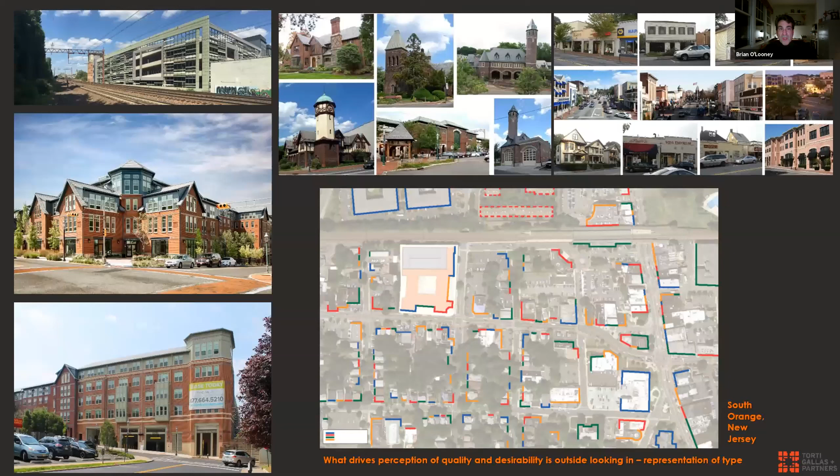Just to show a little bit of our work, to show the framework where we're coming from in putting the book together. This is a project in South Orange, New Jersey. The upper right shows imagery of the community where this very large building was landed into the town, and the colors simply represent different identities within the framework of the downtown of South Orange.

The train station where you get off into town is here, and in placing this large project into the community, we realized that it needed, and we were forced by the community, to come up with ways of scaling it down to take what is a type 5-story wood building, a very large building, and make it feel like it belonged in

a community made of generally smaller buildings. This is not about respecting style. This building actually has two traditional building identities and a modern garage identity. At one point, one of the traditional identities was a modern identity, and we went back and forth with the community discussing what it meant to have a modern identity and what their view of it was. We ended up where there's one modern identity, where the garage represented the modernity, and the other buildings reflected a present take on what they had in their context, which you see again in the upper right.

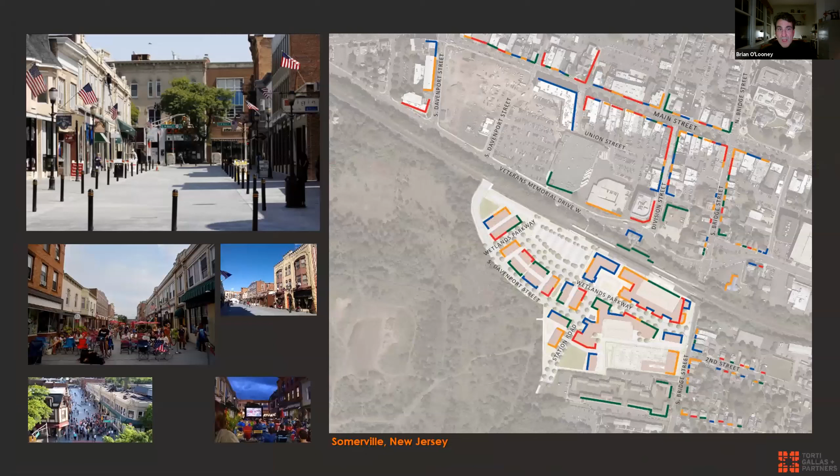Similarly, in New Jersey, another transit project, this one where the whole transit parking lot is being transformed into a district on the other side of the station from the existing downtown. This is a place called Somerville, about 25 minutes north of Princeton. The images of historic Somerville are on the left.

Looking at the project on the right, the project that we've added in the lower part, the image on the right, there's only two types in the whole project. The question is, how do we take those two types and make it feel like it belonged to that community and that neighborhood?

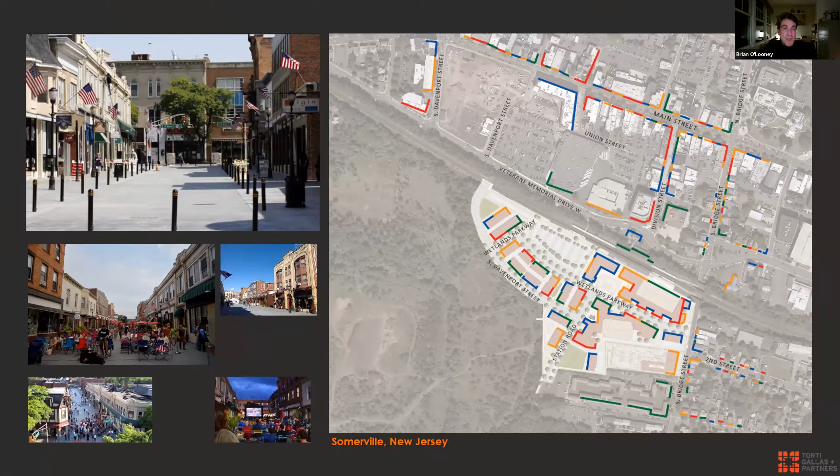So we started creating scaling efforts in a way that made them part of an assemblage, part of one community at the same time. They were broken down in forms that were anchored realistically to the ground, coming with a way of addressing form.

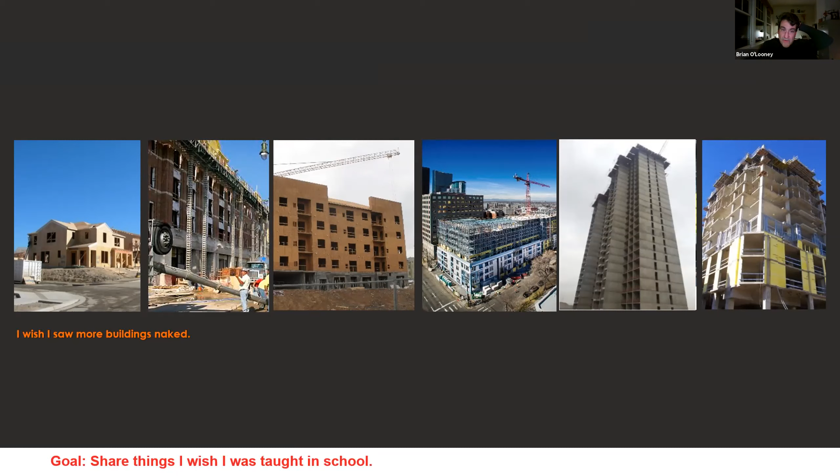And again, it's agnostic. You can't tell from looking at these, for the most part, whether they're going to be traditional or modern when they're done.

And finally, help evolve the incremental thinking in planning and architecture, so that there's less fear about mixing type, because in many ways, in most instances that we've seen, it provides richness and character to neighborhoods and communities.

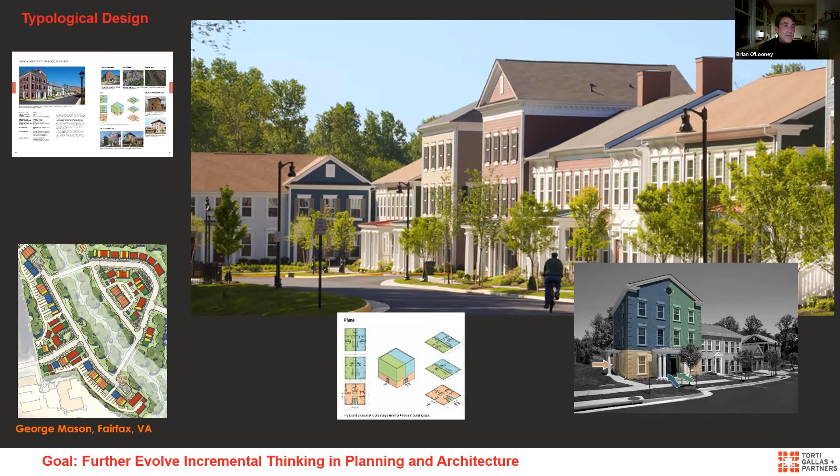And again, those initial neighborhoods, Georgetown, Short North, the Lower East Side of Manhattan, there's a lot of mixed types that make them rich in character. So some of the challenges of putting the book together: simply trying to find a way to present this information in a succinct manner that made it easily accessible.

So we came up with this spread with a large image on the left, data and a description on the lower left, construction imagery in the lower right of the right-hand page, a relative scale image in the upper right that you can fan the book and see everything at the same scale, a missed opportunity that can show really bad examples, and then plans and other kinds of graphics in the lower left of that right page.

The way this was organized allowed us to pinwheel the different sections on the right to grow or shrink depending on how much content we had, because some types had different levels of content for the different categories. That helped us put it together in a reasonable way to make the content accessible.

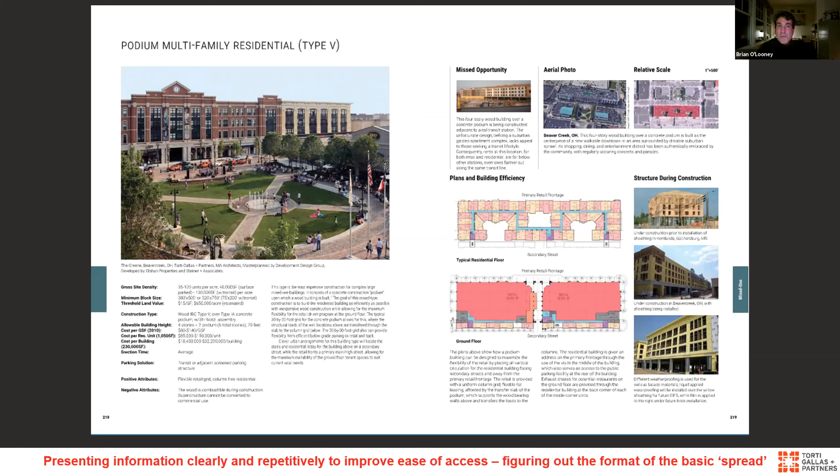There are a few types we were also able to add extra pages to, since there was so much information, but for the most part, the types are presented in 2 pages.

It was also just difficult logistically. We had about 1,000 images in the book, and we had to get a piece of paper signed for every one of them. So that's hard, and we relied on a lot of imagery.

I relied heavily on the firms I'd worked for in the past, so there are more images from Torti Gallas, David Schwartz's office, Cesar Pelli and Associates, and other firms, because I was given good access to their catalogs. But generally we pushed hard so it's not intended to present the work of those firms specifically. It's intended to present the best examples. So sometimes I replaced a lot of Torti Gallas and the other firms' work with examples we thought were better or more exemplary of the type from other firms, and then struggled to get the sign-offs on the imagery.

So in this particular spread, the upper images are Torti Gallas. The images on the right are photos I took with my camera. The 2 plans in the middle of the right-hand page are Torti Gallas plans, but the rest come from Anderson Kim, and we got Anderson Kim to sign off on that.

But that was hard. And then another challenge putting the book together was defining types: what's their market distinction, what's their role? A lot of people didn't even, some of the reviewers of the book putting it together were confused by this.

They were like, why are we talking about all these different townhouse types? They had no idea how different from a market perspective a 14-foot townhouse is from a 16-foot townhouse, and what you're enabled to do with an 18-foot townhouse, because you can now park 2 cars underneath it that you couldn't do with a 16 or a 14. So figuring out those distinctions was important.

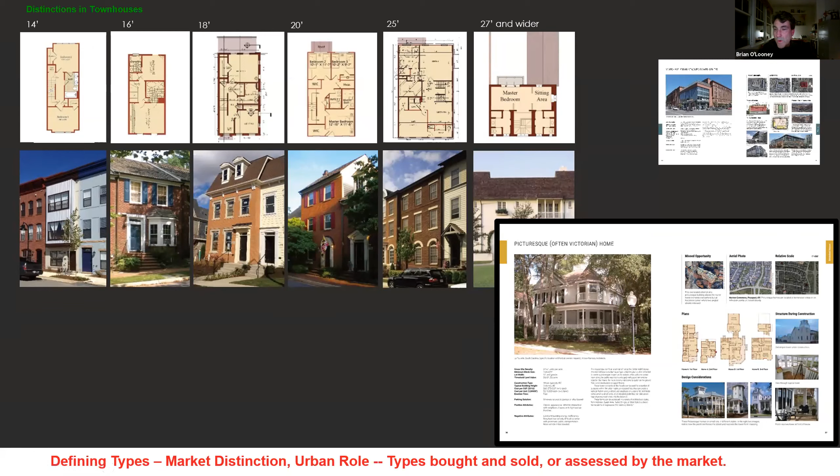We wanted to academically clarify missing middle types because it's a vague category that isn't well expressed. We realized that missing middle is a lot of multifamily corridor and walk-up types, but really there's these stacked residential types, which are walk-up and often self-parking types. So you can walk in, your entry on the front, parking in the back—types that we wanted to categorize and put together in a section of the book, and there's enough of them where you can put a whole section together.

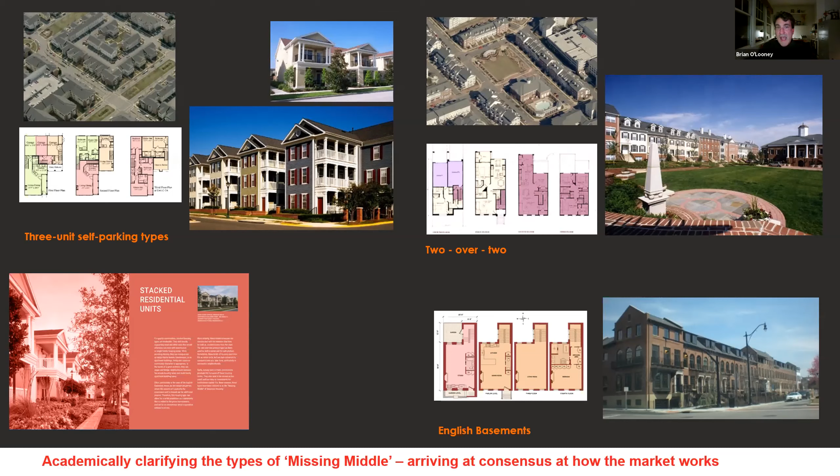There are 3 unit types, there are 2/2s, they're the standard English basements. All of those were put together in the book in a way to express these very important contributor types that form a lot of these wonderful neighborhoods that have missing middle product.

And also we want to expand the notion of missing middle. So many of the publications out there are talking about residential types and walk-ups, but there's a lot of flex types too that should be known and thought of. This is one from the Torti Gallas portfolio where the ground floor—and these are wood buildings, which most commercial buildings are not.

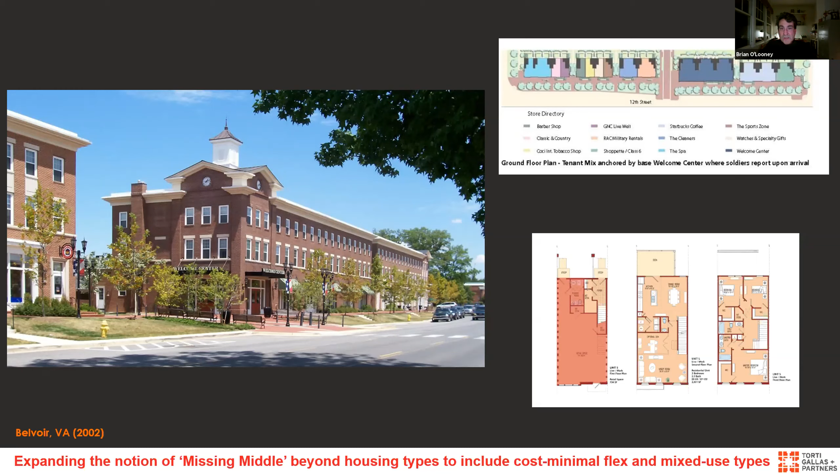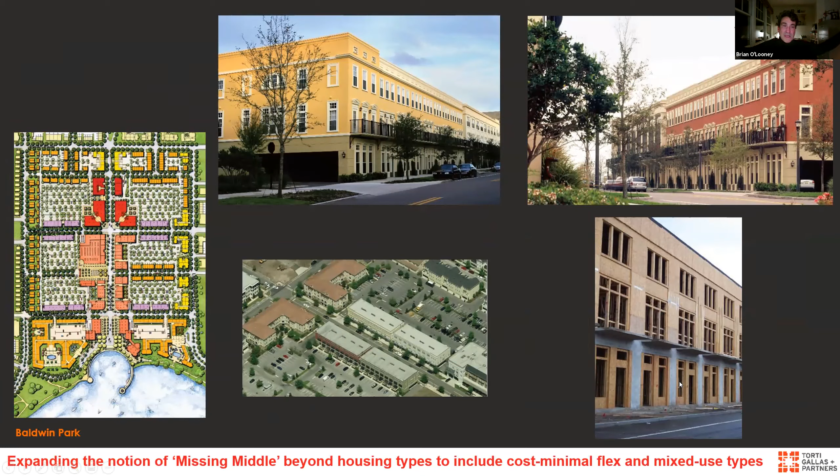This is another flex type that starts out its life as residential because the market's not there day one, but they're expanding the neighborhoods around this particular project so that the ground floor expands. You can see how it could clear out in the future for doctors' offices or commercial.

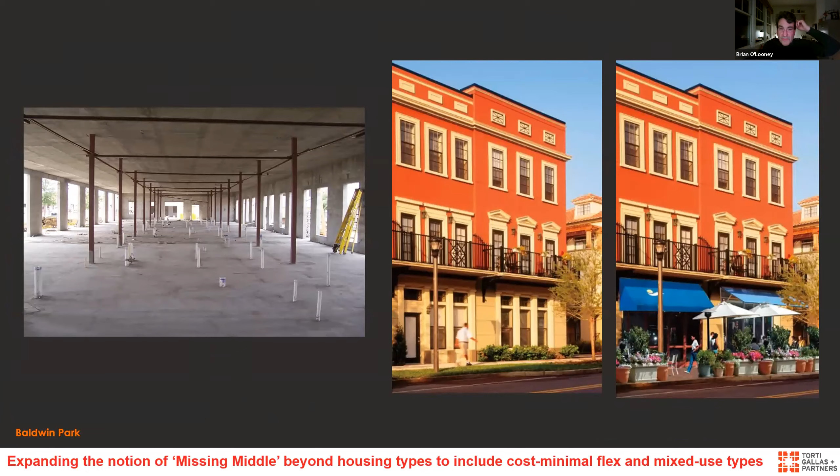And this is the master plan. So the main street had commercial day one, but these side streets were flex units that could go from residential day one on those streets, but eventually to commercial. That flexibility made those buildings buildable day one, and then the context, the connectivity present on the first day of development.

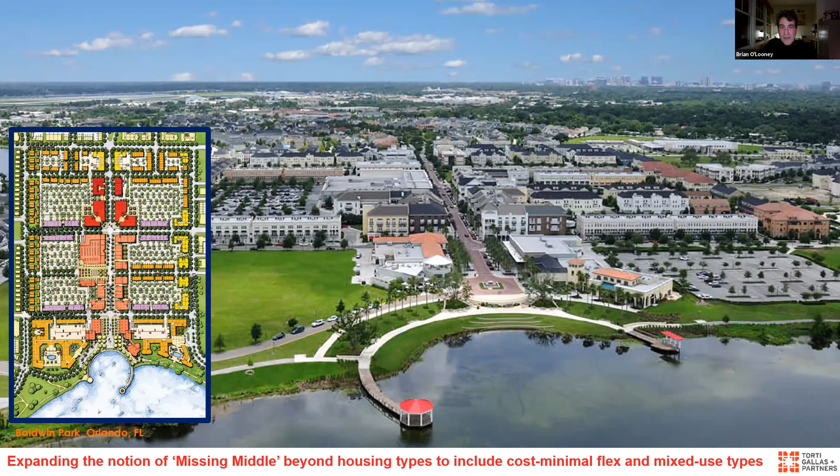One thing we learned, one challenge was trying to demystify courtyard types. And really what we learned was that courtyard housing is just assemblages of other smaller types. This came from a long conversation I had with Stefanos Polyzoides, who's now the dean at Notre Dame, and his firm is very passionate about courtyard types.

There are courtyards that are assemblages of single family homes, which means they're in a different code section—they're residential code, not multi-family or IBC code, International Building Code. There are 2 types of townhouse courtyard buildings: one, you can surface park like the single family courtyard type, but everything beyond that, anything more intensive than townhouses has to be podium parked.

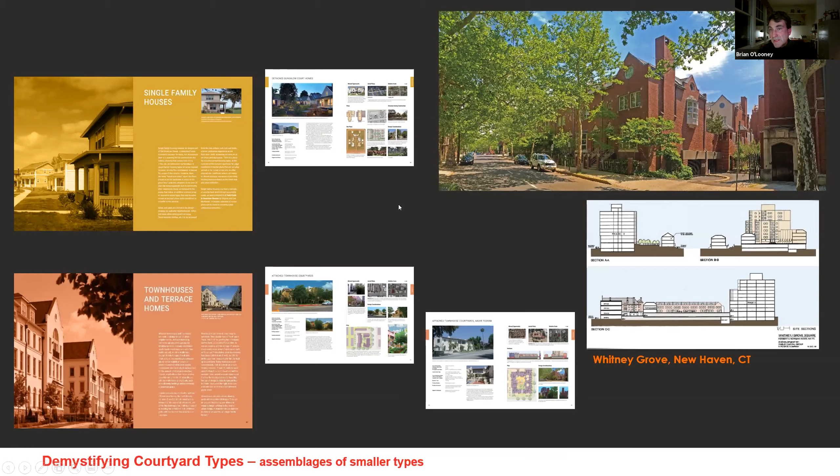There's a great podium parked example in New Haven that Herbert Newman did at Whitney Grove, and the examples in the upper right. Then more intensive courtyard types as you add more intensive multifamily or stacked unit product into the mix. That creates the different types of courtyard product until you get to the Del Mar example, which has retail and corridor building and walk-up and townhouses all in one, and office buildings all in one project.

So, lessons to share—this is the last part of my quick presentation. The impact of the building code and the economics of housing on what gets built. We see a lot of master plans out there where there isn't an understanding of the building code, and consequently the codes ask for a size or scale that the building codes don't support. What do I mean by that?

So the residential code allows houses to get built up to 3 stories. You can also put townhouses together. Anything more intensive than that, you can put 2 units stacked, but you can't put 2 stacked units next to one another, otherwise it becomes an IBC building.

The next tranche are wood buildings coming from the frame world. The type 3 tranche is an interesting one, which comes from the Chicago world, where there used to be masonry bearing walls and wood floors. That became a type that the drywall industry pushed back on and said, well, wait a minute, those masonry walls are 2-hour walls, and we have a 2-hour wall too, with just more drywall on it—you should allow us to do that. In the end, most jurisdictions agreed, not all.

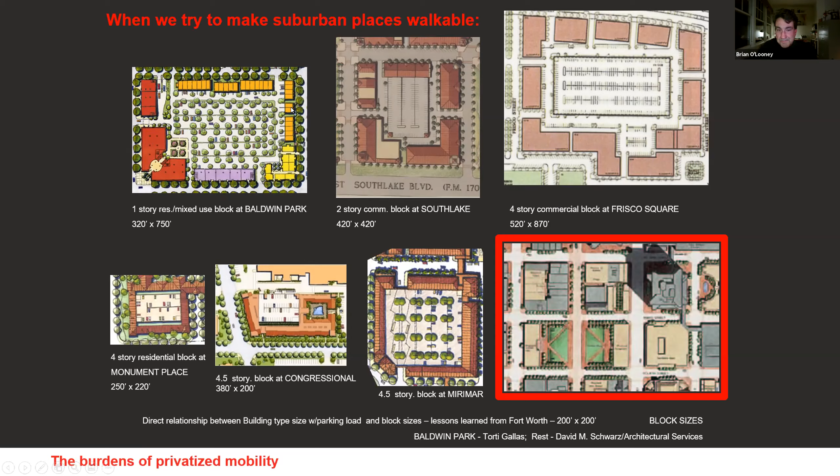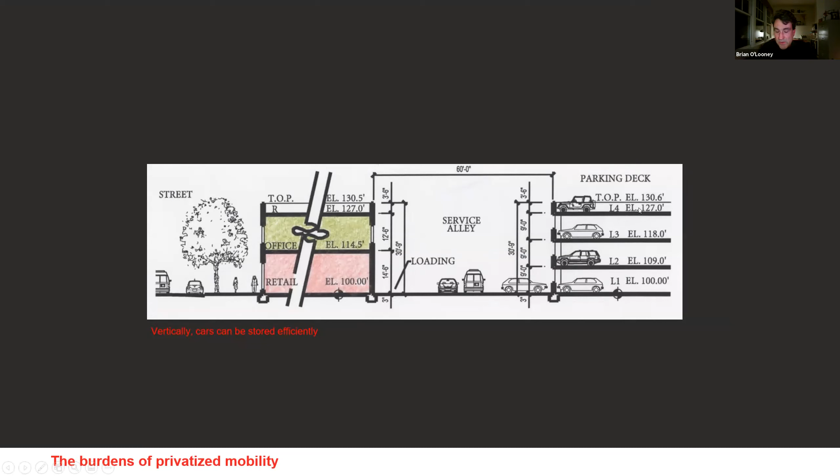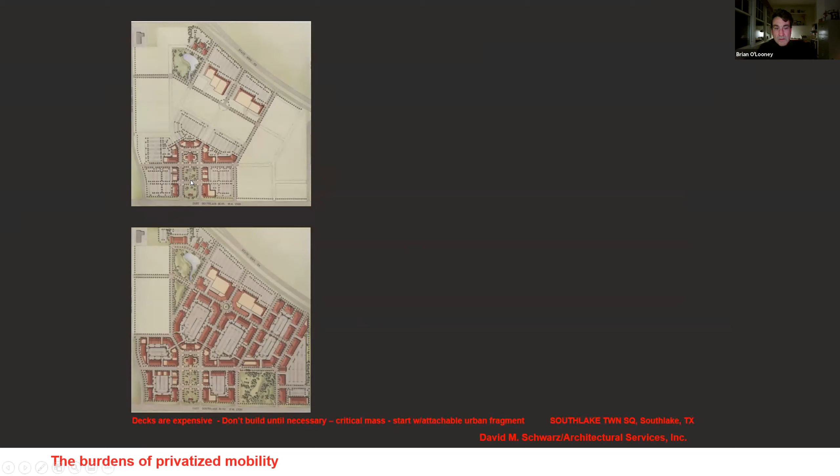This is the Southlake plan, which started out day one as a surface park destination. So you made the place, established a vision for the attachable fragment of urbanism, and then it grows over time. Eventually the blocks trip a deck, so you have 2 sides of every block built that make frontage. Then when you trip the deck, you can finish completing those blocks. That's what's happening in the upper part of this image here.

Interesting, one of the conversations I had with Andre this morning was about Hope 6 and how that didn't necessarily end up with the same results, partly because they tried to come up with incremental responses and invest in creating personal investment opportunities for the folks who live there.

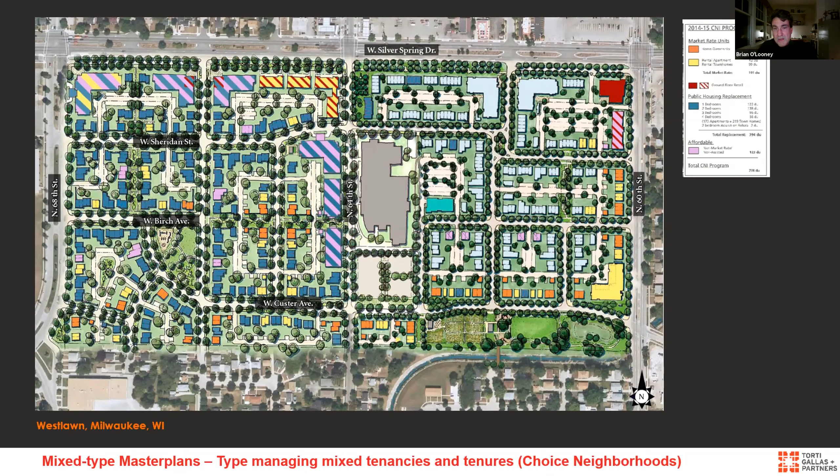The folks that lived there bought into this notion, felt like they're part of the overall city and community, and defended it, put Christmas lights out, and did the things you do when you have ownership and personal investment. This is another plan, again with more types, more home ownership, and actual retail being brought into the project. This is a choice neighborhood, the next program after Hope 6. This shows how this neighborhood is developing and the different kinds of types brought into it, with more of a stylistic mix of modern and traditional buildings.

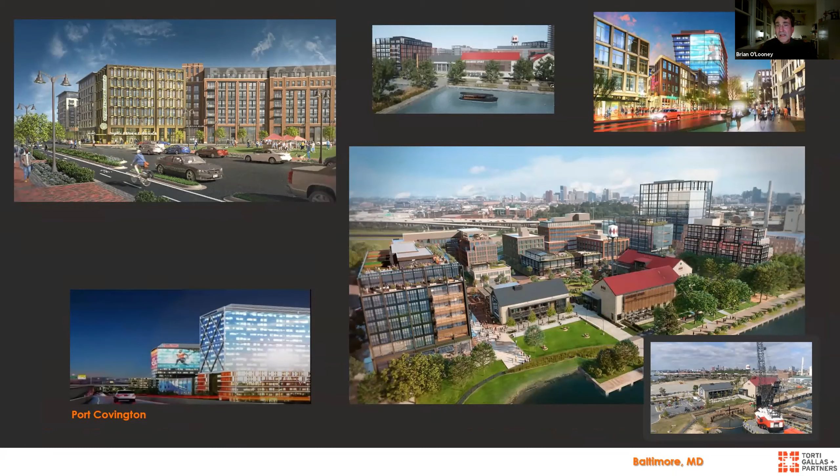And then this one is in Baltimore. We're doing the building in the upper left. There's a lot of architects involved here. Again, this is a waterfront parcel in Baltimore, so it got the best financing from Kevin Plank, the owner of Under Armour, and Goldman Sachs. And we can discuss what that means.

Finally, I want to talk about measuring influence and value, and get back to the notion of measurement. We're in really exciting times. We can start measuring the impact of planning. There are firms like Supernormal who are out there looking at, if you add a coffee shop or a restaurant to a neighborhood, or bring a supermarket back, how that changes value and changes perception and strength. It's an exciting time to be thinking about these things, and thinking about what it means for the community that surrounds a destination.

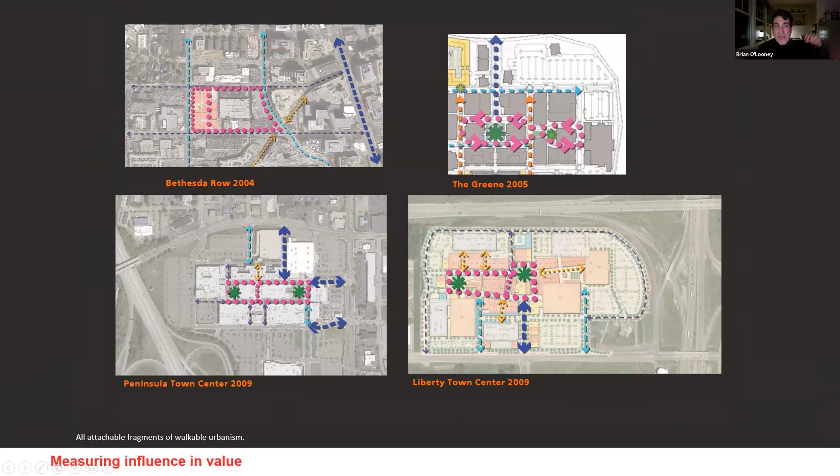And even though those destinations may be very formulaic, we can start to measure the difference between a residential building in that destination versus a multifamily building of exactly the same type that isn't walkable and isn't in that place. So with that, I'd love to have a conversation about any or all of those things that I hope this book will help to start more growth in thinking on for the future.

So with that, I'm done. I hope I didn't go too long.

So that was a little over a half hour, but not bad. Sorry, I was muted there. That was great. Thanks, Brian.

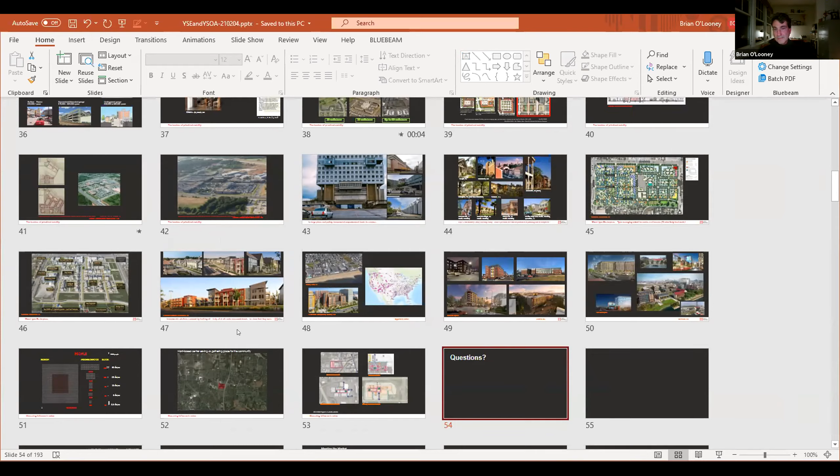So I guess before we jump into questions from the audience, I just have a couple of comments and maybe a question. One is that in architectural circles, typology is a kind of slippery term, right? It refers to a lot of different things. And it seems like what you're doing here is combining a traditional definition of architectural type with something about market differentiation, so that the housing types are not only about their physical form, their parti, but instead really take in something about providing diverse unit types of housing for different kinds of people that can sit cheek by jowl in neighborhoods.

And I was struck by the 19 standard product type description slide that you showed earlier, because as urban designers and architects, we often have these conversations with developers who say, yeah, but I can't do that because these are the rules, this is my product, this is the pro forma, the bank has already approved this. So I'm wondering whether part of the aspiration of the book has to do with trying to create a foundation where you can make arguments with developers about more diversity, and also whether you've had success doing that in your own practice.

So that's a great question, and yes, that's an intention. That was what the call was, almost from Chris Leinberger's article, that we need to come up with these types. So that was part of what we strove for, but part of it was just reinforcing what the market's already saying. It's great for an architect to try to envision or develop a new type, but sometimes we're not all powerful.